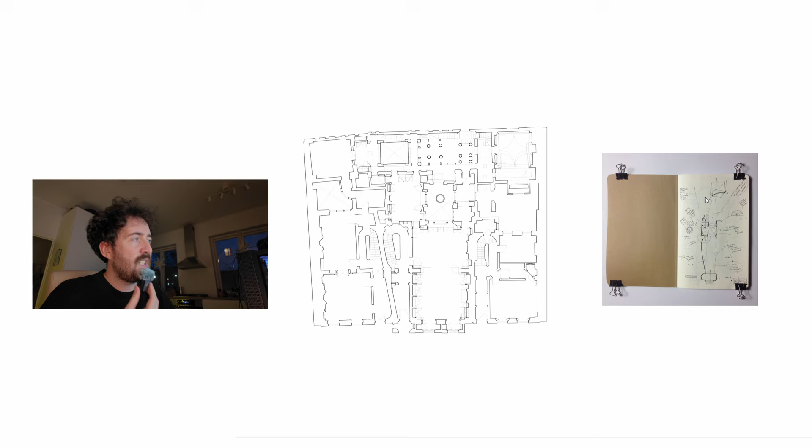What you're seeing here now is a survey drawing of the Soane House that I produced back in 2016 as part of my written dissertation. On the right is a photograph of a sketchbook that I carried around with me on one of my many trips to the Soane House.

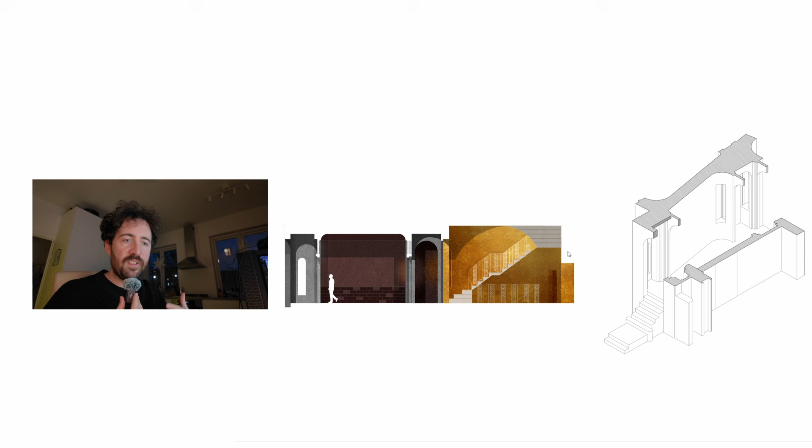At the beginning of this portfolio journey, this thesis journey of mine, we were each assigned a house, a precedent, and challenged to survey that house and then develop an architectural proposal that we argued would improve it. Because the Soane House was one of the houses available to us, and I had already written my dissertation on it, I asked if I could use the Soane House for the basis of this project.

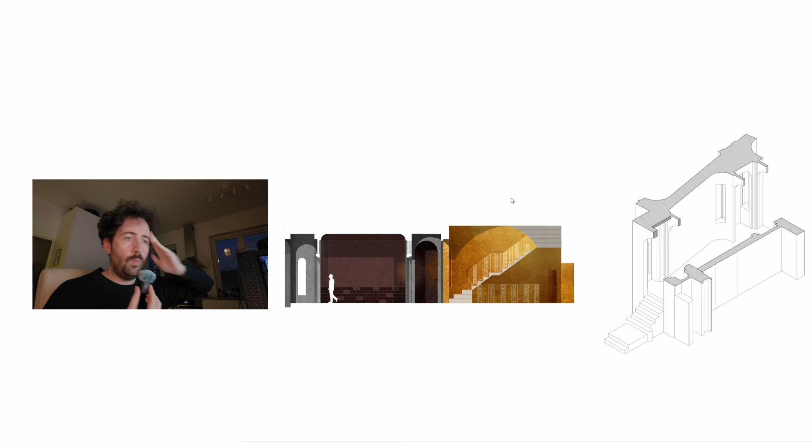What you're seeing here now are actually two drawings I produced as part of this elaboration exercise, where we would take a part of an existing house, study it, and then propose an architectural intervention within it - either adding something, removing something, or tweaking something. It was a way of understanding how we worked as architects, and how you can do quite a little to make quite a lot happen with an existing architectural space. This Soane House study, in conjunction with the dissertation itself, became the entire foundation of the thesis and the portfolio, and you're going to see that now as we go along.

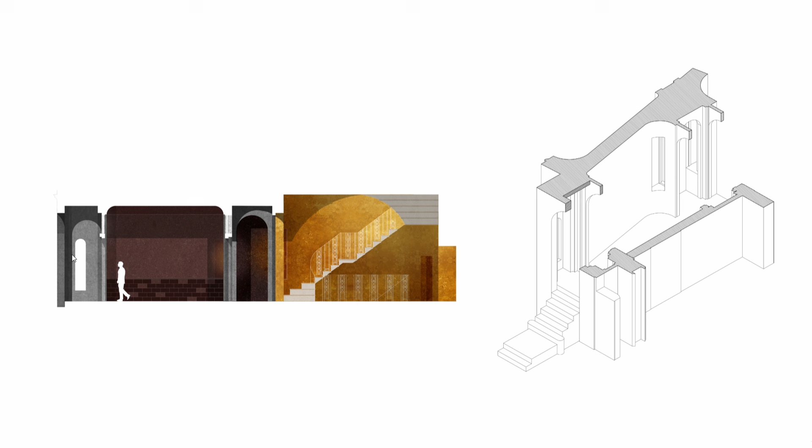What you're seeing here now is a cutaway isometric drawing of the entrance threshold to the Soane House, and then this artfully rendered section drawing that demonstrates the sequence of spaces upon arrival. If we jump onto the next drawing, that same space has been drawn in plan twice, with a model photograph of the existing condition.

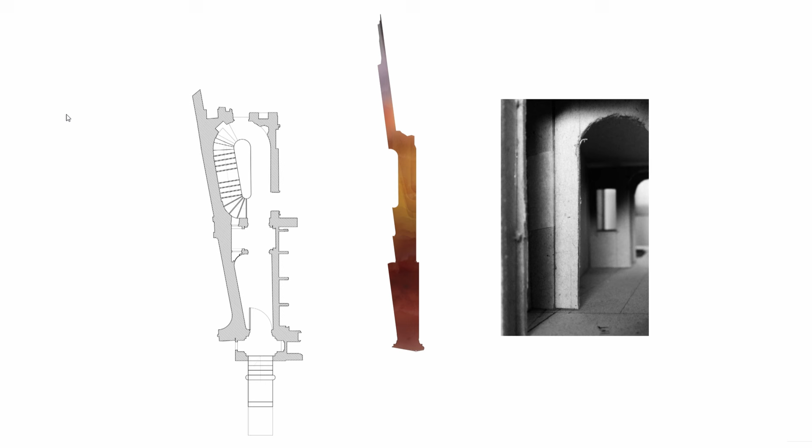What you're seeing here is that basically the entire dissertation and this study overall was about redrawing the plan of the Soane House based on the experiential quality of the architecture - not necessarily what's there physically, but what can be felt almost metaphysically. So here is a part plan of that entrance threshold. You come in off the street, there's a raised ground floor, an antechamber, and the hallway is broken into, I would argue, three spaces. At the end of that space we have the beautiful stairwell, which anyone familiar with the Soane House is probably visualizing right now.

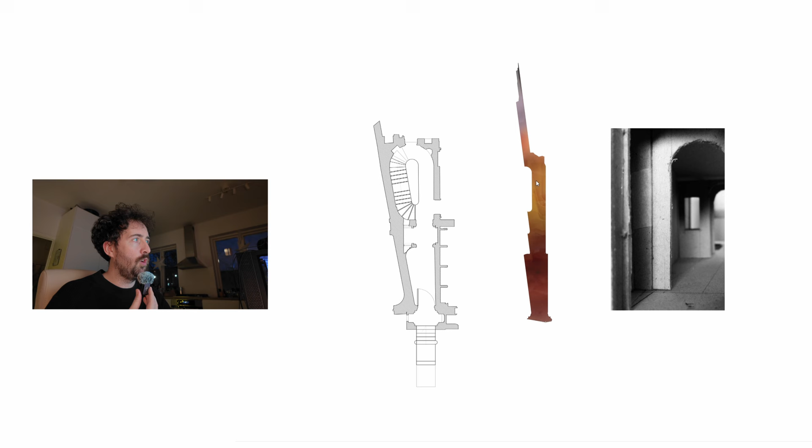This is the plan as it exists, but this, in my opinion, is the plan as it is experienced. The space almost dissolves from four to one based on how this model photograph suggests the spaces work in sequence. It's almost how the space is contained and broken into multiple pieces, but in section the space arguably is one space in its entirety. And this works not just across one level, but multiple levels when you introduce the verticality of the stairwell into the mix.

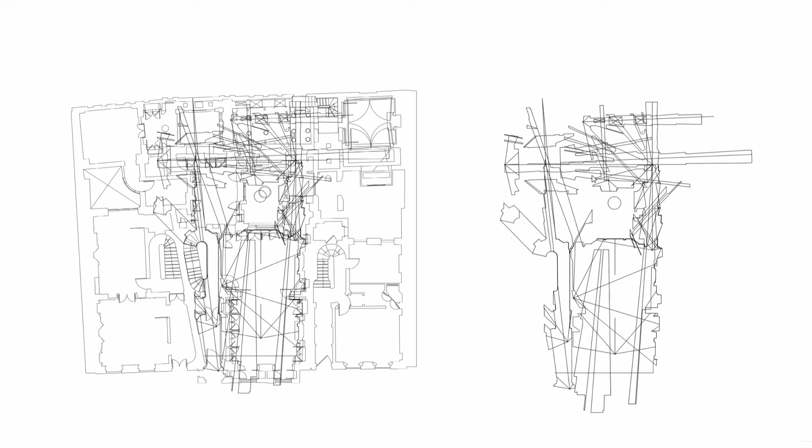Then we take this approach and apply it to the entirety of the ground floor. We can abstract these splays to something like this, and then assess the spaces that I consider are of the richest architectural quality. The rate at which these intersections occur suggests there are more spaces visible beyond the vantage point in any location. That suggests that spaces such as the reading room, this hallway to the right - this threshold, which is a wonderful sequence of spaces - and the breakfast room, and the study at the back, are of an incredibly intense architectural quality.

And this just fascinated me as an architectural study. The Soane House is one of my favorite buildings, one of my favorite pieces of architecture, because it has that incredible rich texture to it, spatially speaking.

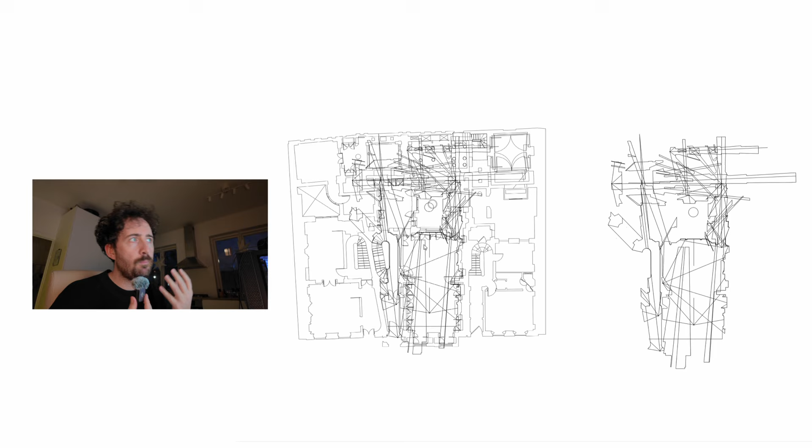Okay, we know that the Soane House is good architecture, but what do you really do with this information? And how is this layering, this effect of blending, how does it occur physically?

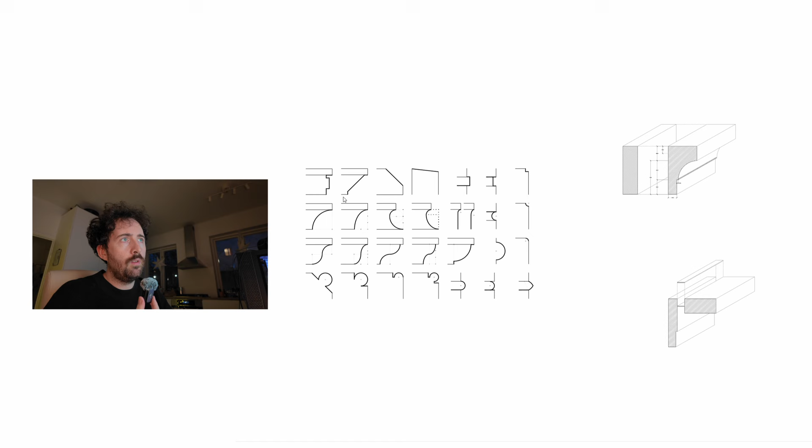So what you're seeing here on the left is a diagram, I believe an existing diagram, a piece of analysis that studied all of the coving profiles that exist within the Soane house. The idea then was to take one of the existing coving details

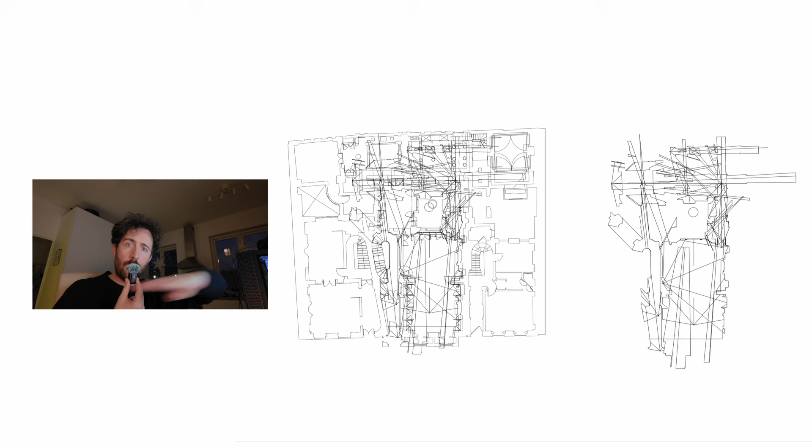and remove it from the lining and replace it with a roof light. That's it. So the idea was, can we get this layering effect that occurs on the ground floor on a singular plane by introducing an opening in the ceiling by removing the coving? Can we get the effect to work vertically also?

So what you're seeing here is a before and after photograph where the molding in the ceiling, the cove detail, is removed and then replaced by the light well.

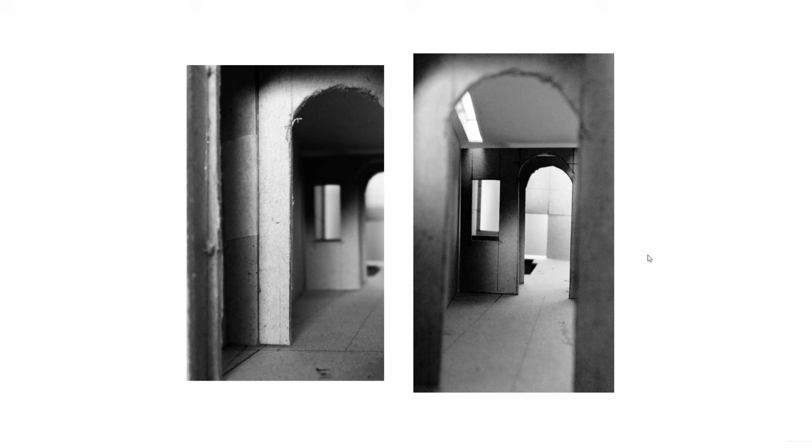And yes, of course, this is a series of models that prove the point I'm trying to make. But regardless of whether this thesis is correct, I still think it's an interesting place to begin a study. This was the beginning of the thesis and the portfolio.

But before the thesis sort of begins proper, we were taken on a site trip to London. And what was really unique and frustrating about this is that as a unit, I think there were 20 of us, we were not actually assigned a site in London. We were just given London for the week, and it was left to us to go find our own site.

And it overlooks Highgate Cemetery on the east and the west, and a giant public park, I believe it's called Waterlow Park. And there are some incredible vistas over the entire city of London. And I just figured this is really dramatic, it's a really cool space.

This is where I'm going to build Soane House 2.0. Obviously that wasn't the idea at the time, I don't know if that was ever the idea, but the idea was I'm going to propose something here in this really dramatic, wonderful part of London, on this site.

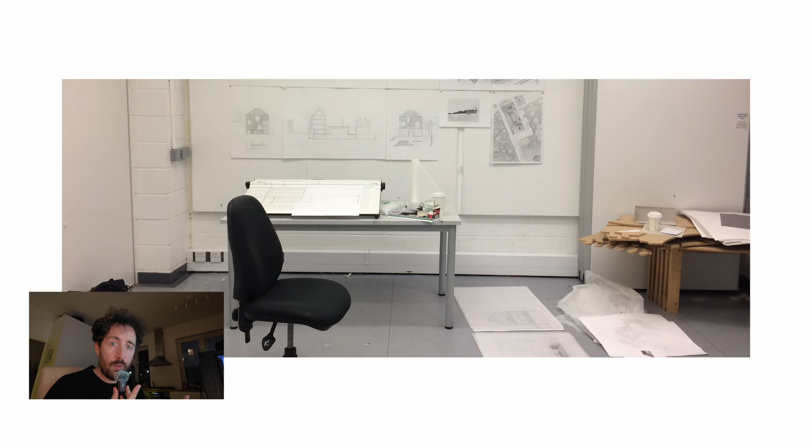So I decided to just go out, buy a piece of A1 tracing paper, set up an old drawing board, and just go to town on it, drawing what I was inspired by and what I felt like drawing. So what you're going to see now is a series of those very first A1 pencil drawings that really kicked off the thesis proper.

Really what happened here is I set up this A1 page, strapped it into the drawing board, and I just started from the left and went from left to right. What you're seeing here is just these really early sketch-like technical drawings in a way. So what you can see here is I just start with the street profile and it goes right off a cliff because I'm proposing this excavated basement layer here.

And then I just start drawing what a person would see at any one point and then trying to translate that across sections. So section flows to elevation, to reverse elevation. We have a little bit of plan here. And I just started projecting and sculpting out these spaces from one another.

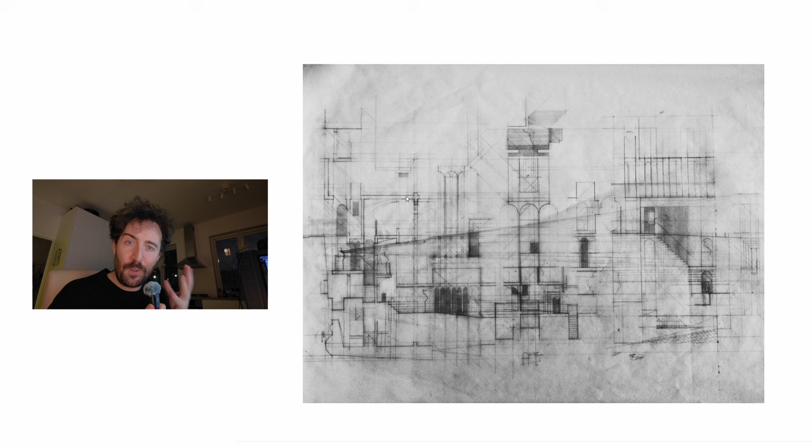These drawings are incredibly messy. And you'll note that there's some annotations here, some different arrays and pieces of detail, and it really just becomes like a giant A1 sketchbook of sorts. Only rather than drawing with the arm, I'm drawing with the wrist, because I've got the parallel rule, I've got the set square, and I can really just make moves really fast.

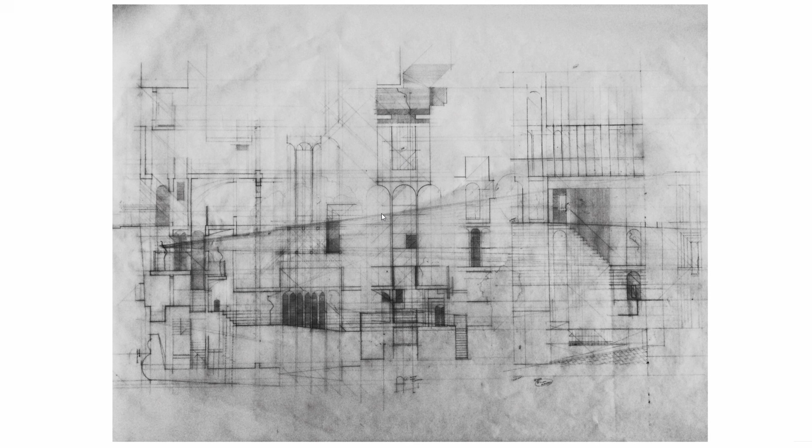So you can see here there's some indication of section and space and volume and depth. And then there's some indication of circulation here, it looks like a staircase. And then you can see how the perspective line splays here. Really what I'm thinking about is how the spaces in the Soane house work. So really I'm already thinking at this point about how do we make this really rich, really dense, and really architecturally interesting to me?

So as I'm working on this drawing, my professor sees it, gets really excited by it, and he's like, give me 10 more. So I was like, yes, sir. Let's go, let's do some more. So then I'm on this sort of pencil hand drawing journey at this point.

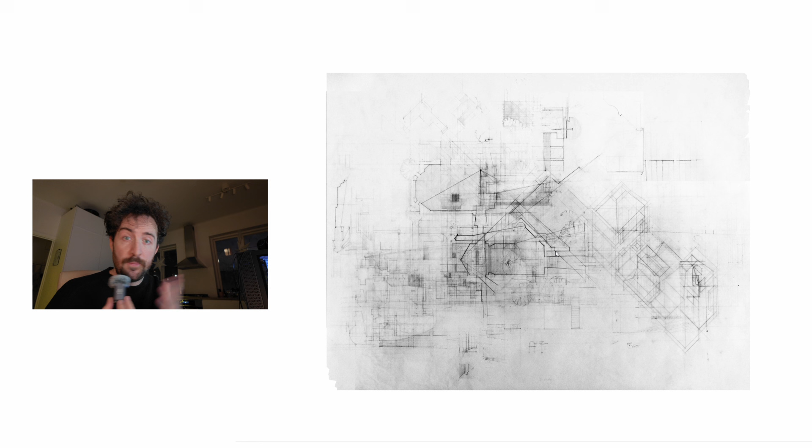And then you're going to see another drawing here now. And you can see even in this drawing, and you have to forgive me, a lot of these original drawings no longer exist physically. Like, they were thrown out in the summer of 2017.

My professor did contact me and was like, yo, I got all your drawings. They're in my office, but I can't keep them for much longer. Do you want them? And I was like, I do want them, but I'm already living and working in London now. I'm not coming back to get them. I've already got a job. Throw them out. So he probably did. So I have no idea where they exist now.

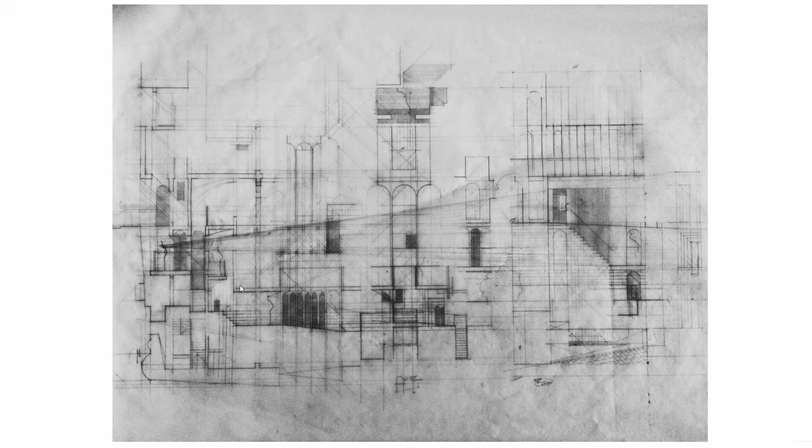So what you're seeing here is basically a series of scans and photographs and overlays that were made as part of the thesis project. So this is another one where it's sort of like drawing on top of drawing on top of drawing. So you can see faintly that original drawing, the one that we just looked at here, is actually underneath this, and it goes again and again and again, and the drawings all stitch into one another.

But what you can also see, if you've got a keen eye, is that these splays are now being introduced into the plan. And what I'm really interested in here is how we can connect one room to another room to another room visually. And you can see here there's a little bit of an overlay of the Soane house in pencil form right here.

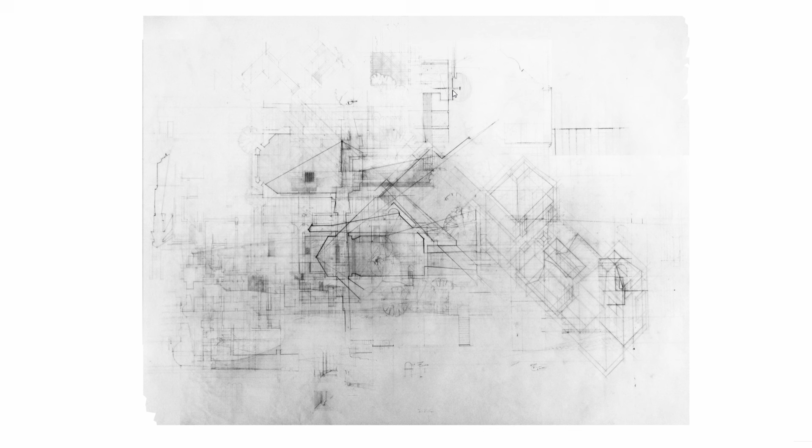But then there's also like these 1 to 5 technical details here. It looks like I've drawn the screw through like a window frame into some brickwork. And then there's some isometric action happening here as well. But this is actually a little bit of a later drawing that's been included. And then we're going to go on to the next one.

And then I'm sort of drawing the site as well at the same time. So it's important to note that I've got one drawing board and I'm only ever working at one drawing at one time, but then occasionally I'll get a little bit bored and I'll overlay that drawing with another one, work on that one, and then go back to the other drawing.

So I'm just spinning plates, working over the drawings all the time. The drawings do have a scale, roughly 1 to 50, but sometimes I pivot into other scales at the same time. Here's a planimetric drawing of the site, showing how Swan Lane cuts down and breaks off to Waterloo Park. I'm just drawing the terrain. There's some sort of structure here overlooking the city, but I don't quite know what it is yet. At the same time, I'm also testing these ideas in model.

So really, I go from this drawing, and then it's like, this is an interesting section - how does it work in 3D? I'm testing it in 3D, and then I go back to the drawing, which obviously has more detail.

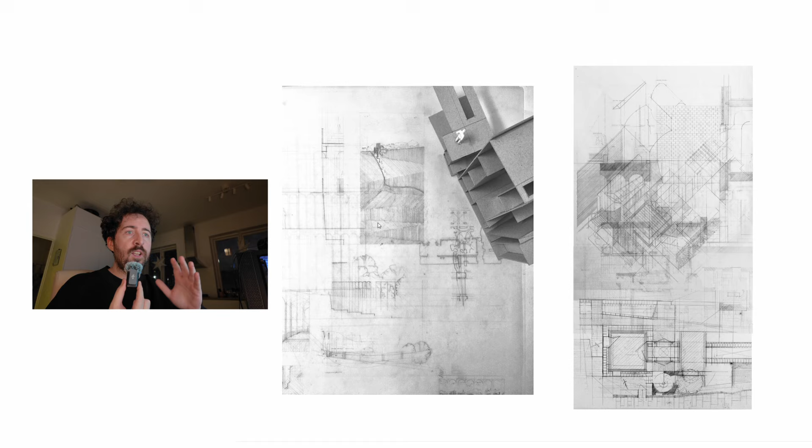It's important to note that even though I don't really understand what this building is going to be at this time, I'm always very aware of the nature of the site itself - the sight lines, the fall and gradient of the landscape, the existing context. This isn't being drawn in isolation.

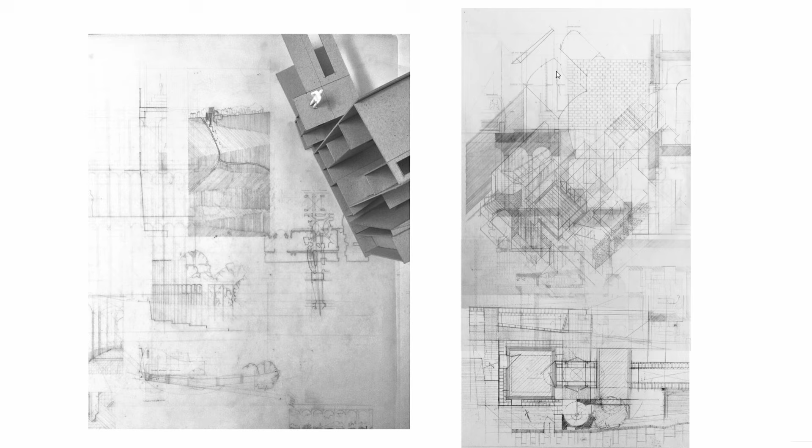It's being considered. And on the right here, there's this exploded axonometric, where you can see I'm introducing the coving details, because I'm really interested in how there's this tension between how the space looks from the outside and how it's actually experienced on the inside, and how lining is curated to dictate our impression of a space, and how we measure the thickness and depth of a space. That's all lining - it's all artificial, it's all fake. And I think that's amazing, really exciting. So lining is going to come into this eventually.

And then I have another part of a plan here. You can see that even within the space of a week or two, we go from this dreamlike idea of a space to consideration for structure, thickness, door openings. It really does just jump along quite quick through drawing. It only happens through drawing - I'm only able to do it with the pencil, the parallel rule, and the set square.

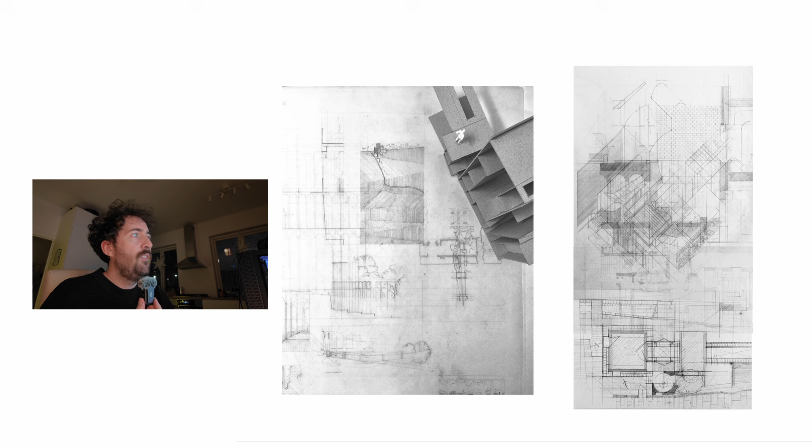That's really what I'm about here - I just want to see how extreme. Can I turn it up to 11? Let's find out if I actually get there.

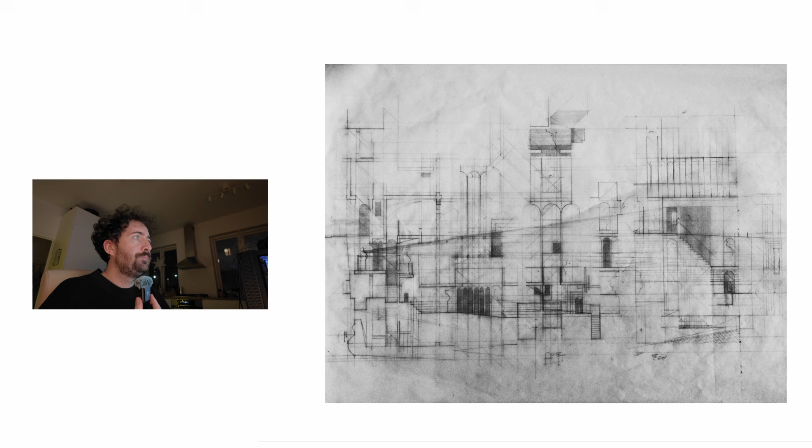And that's what you're seeing here with this - there's a space that intersects visually with other spaces. There's part of the existing terrace where at this time I've taken over. You can see the existing terrace floor plan goes into this one, then there's a tree line, an existing wall, and I'm really just drawing everything here. I really just have permission at this point to go wild, and it's so much fun.

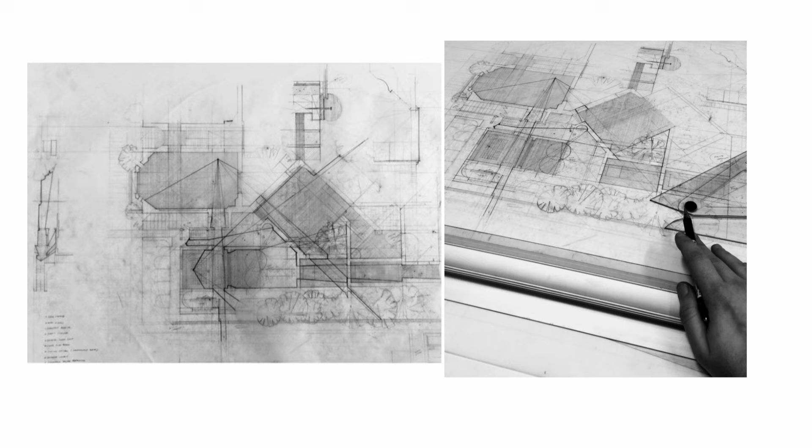You can see there's enthusiasm in these drawings - I just love it so much. And again, there's just another version of it, and you can see here on the drawing board, a photograph of the actual drawing board from 2016.

There's hand-drawn surveys of the existing terrace and semi-detached houses around the street, a bit of a wall survey, and some basement details. I'm drawing at all different scales at all different times - another version of the overlay from before, going from plan to section to elevation, little 1 to 5 details down here, everything. I'm just drawing everything I can, really building an understanding for what this piece of architecture is going to be at this point.

Problem is I've got a midterm review coming up, and I just freak out - nothing's finished, I need some final work. So what do I do? I completely freak out, stop, drop the pencil, and run back to CAD. I'm just going to draw up what's in my head now, everything I've got here on these pages, and see what I get.

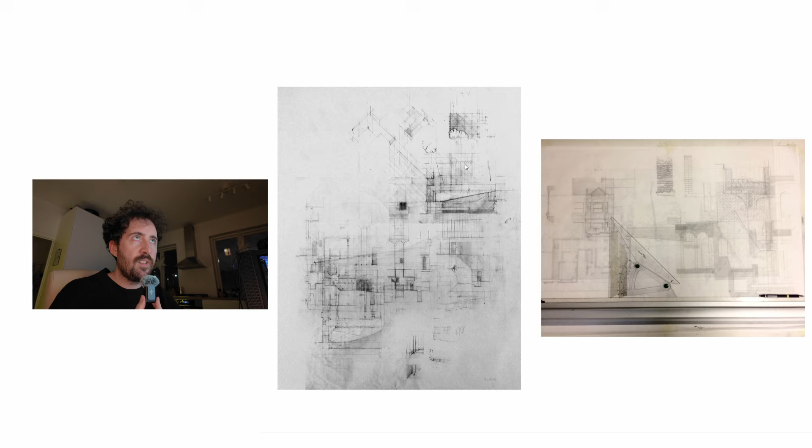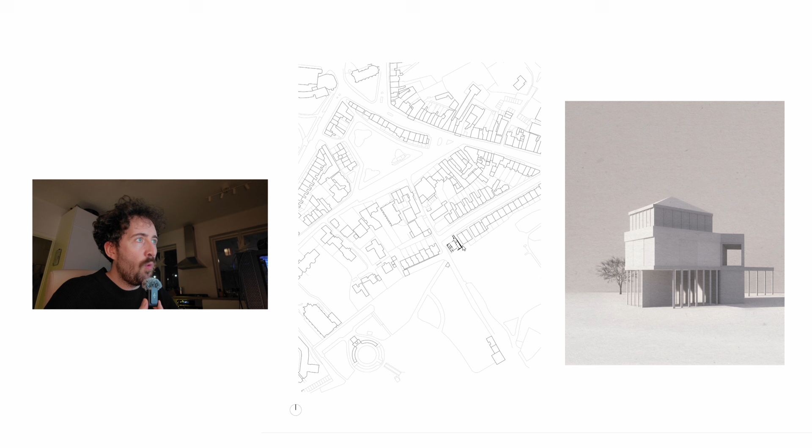And this is what we're looking at. Now, I'd argue it's a little bit boring, but they're not bad drawings. Here's the site plan - it's really a bit unfinished, and we've got sort of one house at this point, even though the vision for the project is that it will become many houses along here. We've just sort of got the first house.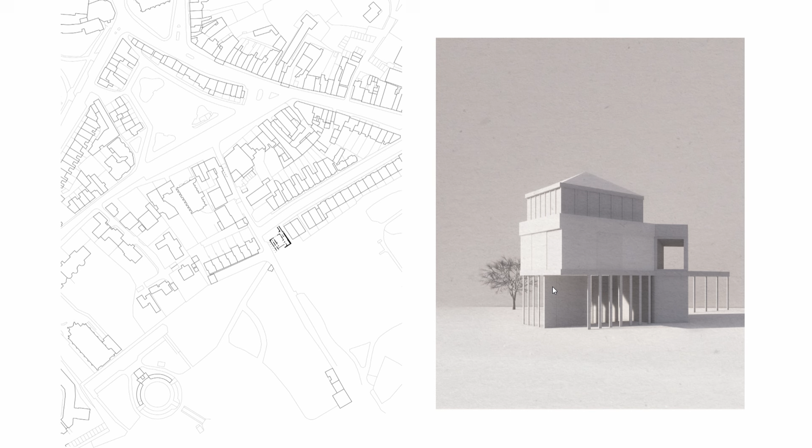So this is sort of the culmination of all the drawings here - we've got a little bit of a colonnade, a house across 3 stories, there might be a basement. We've got different architectural languages on each floor. It's a little bit of an odd house, like a little treasure box of different ideas. It's got a little pitch roof to respond to the context, but the pitch roof also has a false depth - I'll talk about that in a minute. This is sort of just where I got to.

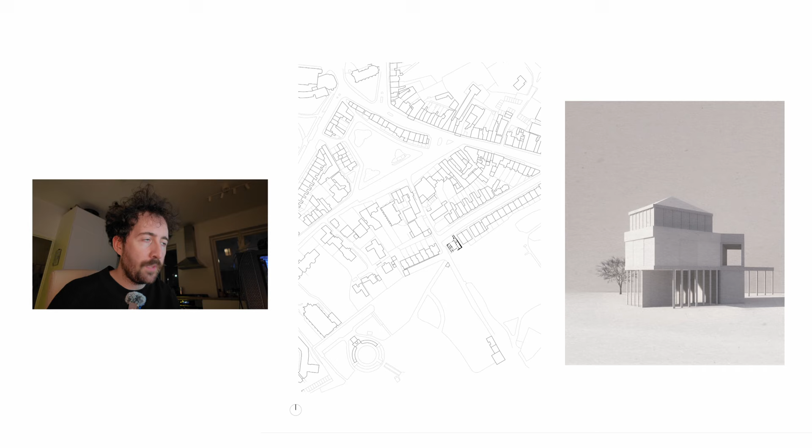These computer drawings were received just fine, but I ended up having a meeting with my tutor after the review, and he was like, we know you can draw with a computer, we know you can do 3D models. He said he'd prefer it if I just spent the final semester - the remaining 12 weeks - going as far as I can with pencil drawing. And I was like, yes sir, let's go. So that's exactly what I did.

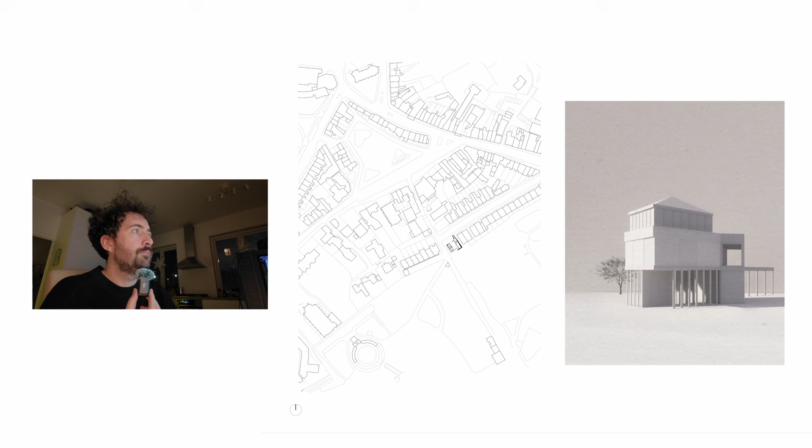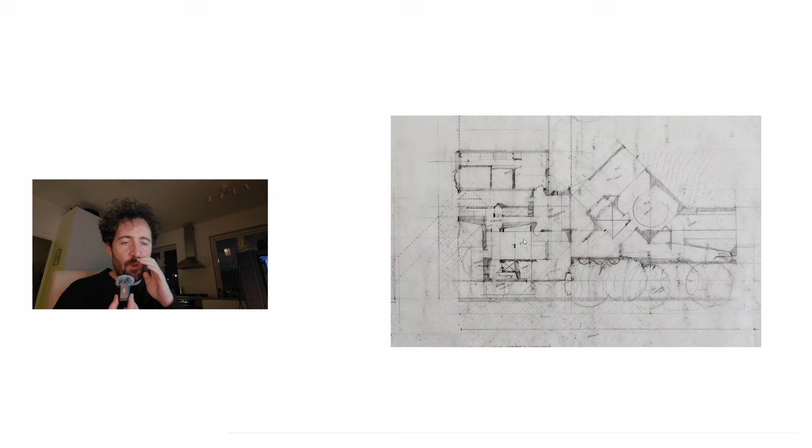And you can see even at 1 to 200 scale, I'm sketching the pavement texture, doing the stair treads. Although the drawing is at a 1 to 200 scale, I'm drawing at like a 1 to 50 scale. I don't know why I was doing that - it's just a bit of a weird thing to do.

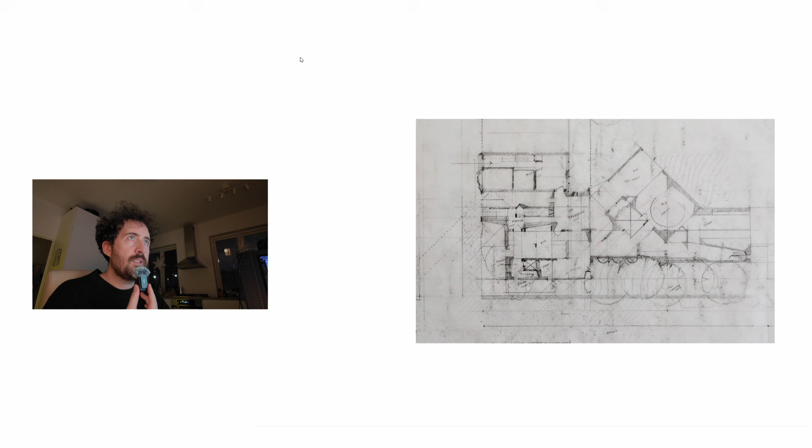Then I just start getting into 1 to 50 scale again. So what you're seeing here now is a 1 to 50 plan drawing based on this sketch, so obviously it's more resolved. But I'm still sort of struggling - I keep getting caught in the first house, not able to go to house 2 and house 3, because I think at this point it's going to be 3 houses all built as one house.

But I can't get beyond the first house because I just keep getting caught up in what this space is going to be. You can see here, the way to get around the level is that there's a public stairway off the street that takes you down into the park underneath a bridge, which I'm using to connect to the existing terrace. But then in off the street, you can come in at street level where the house is set back. You can go down into a basement here, or go through another bridge into the house itself.

So the house is sort of like an island set back from the street on a level of its own, which I was just really interested in—this idea of separating the house from the land almost, landlocking it in a way.

You can see there's the remnants of the 45-degree pivot here, but it doesn't really go any further. It just turns right back into the orthogonal arrangement we had before. And you can see there's different rooms, different spaces, and it is very zone coded at this point, if I do say so myself.

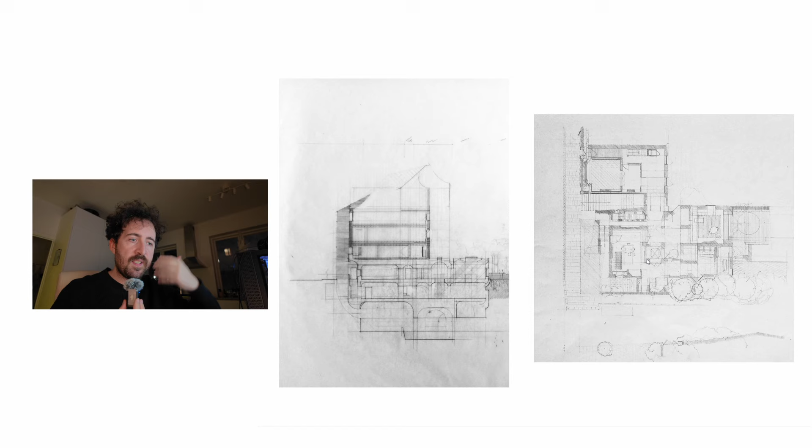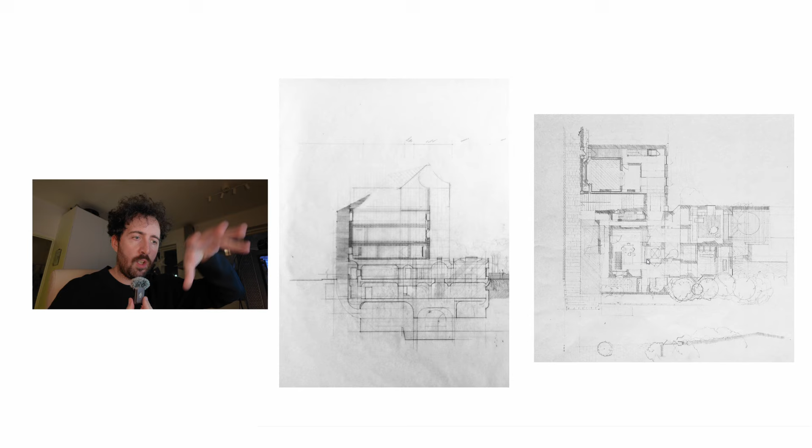But what you might notice is that here I've drawn some coffins. At this point I have a better understanding of what the brief for this project's going to be. The idea is that the house on the hill is going to be a traditional Irish wake house of sorts, where people can hold a ceremony, events, parties to celebrate the life of a deceased loved one. They can also cremate the body, so there will be a crematorium in the basement, and there will also be a private garden where you can have a private cemetery of sorts that can lock into this grieving landscape that already exists on the rest of the site.

But how do you do that? That sounds quite complicated, right? So I have to configure this sequence of space in a way in which they can flow naturally. But what you'll see here is that there's way too much architectural detail in these drawings.

I want to point out here that there is a concept at this point that anything below ground is made of this weighty mass, and then everything above ground springs above it and is made out of timber—timber lining, timber construction. So you've got this sort of light house above, and then you've got this heavy, dense space beneath.

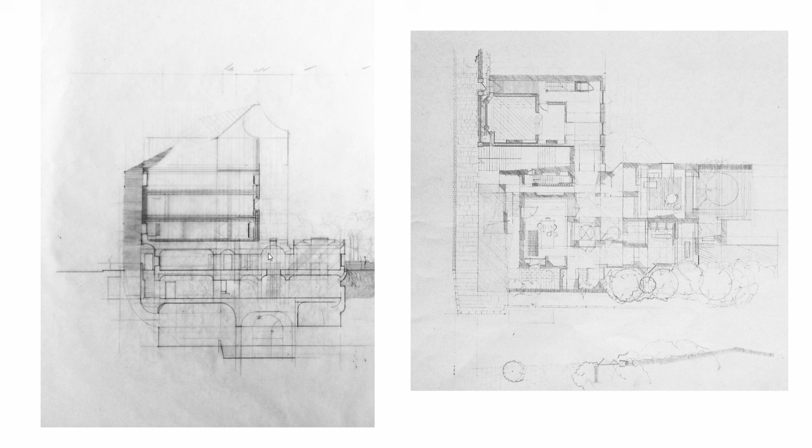The problem is that I still can't resolve one house—how am I going to resolve 3 houses? So my tutor encourages me, says, why don't you just push it? Push it now and see how far as you can go. Let's see as far as you can go.

I need a drawing fast—show me how far you can go with this grieving landscape. So this was the largest drawing that I produced as part of the thesis. I think this is like a 1 to 200 section, maybe 2 pages cut together somewhere.

You can see here that this was the street level, this is the basement with the heavy hatch, and then we have these light pavilion-like timber structures springing up above them. So you've got house 1, house 2, house 3, and then this sort of catacombs just continues all the way down. It's too much.

It's too much. So now, before I didn't have enough, now I've got too much. And what you're seeing here is this really delicate perspective drawing explaining how visually all of these spaces would work from an experience point of view—these perspectives would all intersect and overlap.

At this point you're like 8 weeks out from the final presentation. It's like, I'm never going to finish this. So then the professor's like, oh, you've gone too far, trim it back. And I'm like, okay, no problem.

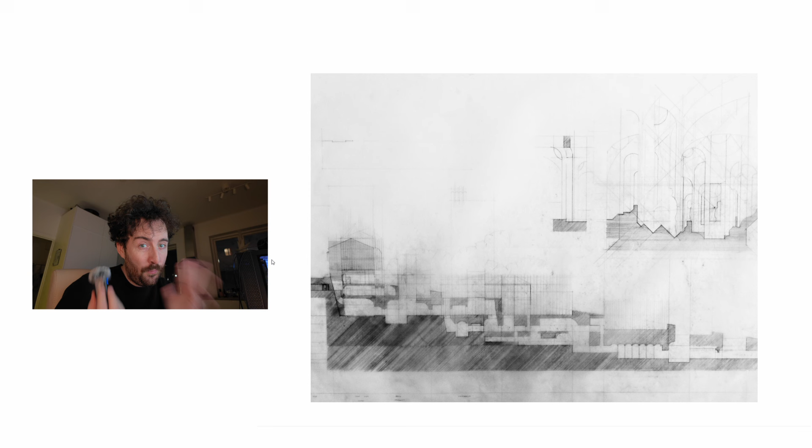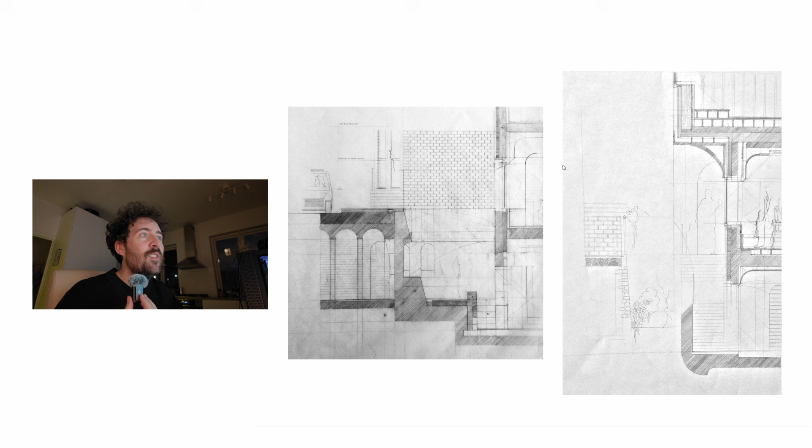This is becoming a problem, and people are starting to get worried on my behalf—professors, tutors included. They're like, hell, you just keep moving sideways, you just keep drawing the same house over and over again. I'm like, I can't help it, I can't stop.

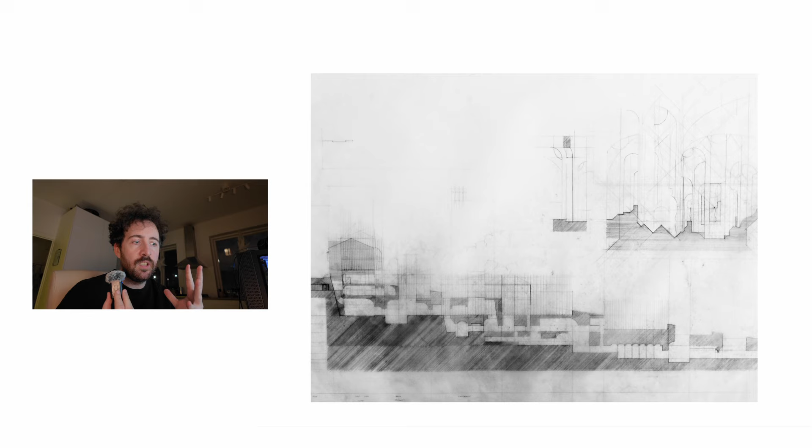So all of a sudden it's like, you've got to draw things with some sort of finality. Like, you've got to do it. You're working at the wrong scale. You've got to draw it.

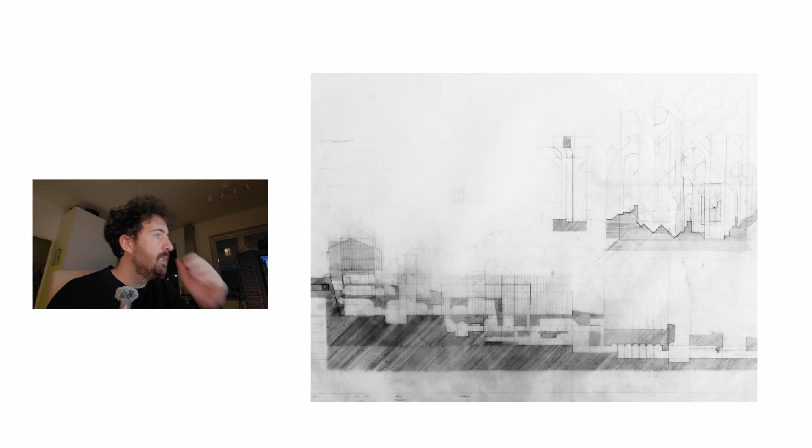And I just realized, it occurred to me at that point, I had never drawn a site plan. I knew what the site was, but I hadn't drawn a site plan. So I said, you know what? I'm going to spend the next 3 days—I'm going to spend the whole weekend, and I'm going to draw the entire site.

I'm not going to draw the building. I'm not going to draw my proposal at all. I'm just going to draw the site. And at the very end of the weekend, I'm going to put my proposal, whatever it is, in it. And that's going to lock the project in. And then I'm just going to work from outside in, because at this point, I've only ever been working from inside out, and it's becoming a problem.

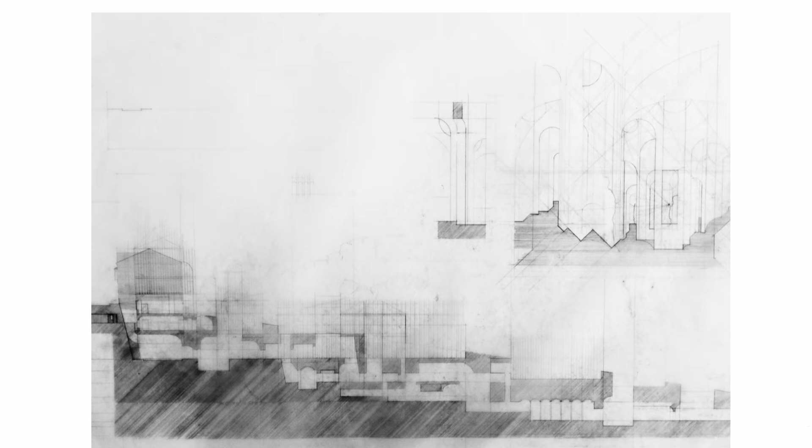And I did not add my proposal, this little cluster of houses here, until the very end. And then what I did, and this was a brave and probably stupid thing to do, when I finished adding my proposal in, so you can read it here, there's like 1 roof, 2 roof, 3 roof. When I finished adding my proposal into the drawing, because this was all drawn on one piece of paper, there were no layers, it wasn't overlays, it was one piece of paper, right? I took the fattest 6B pencil I could, and I sketched in the shadow profile of my proposal, so that there was no going back.

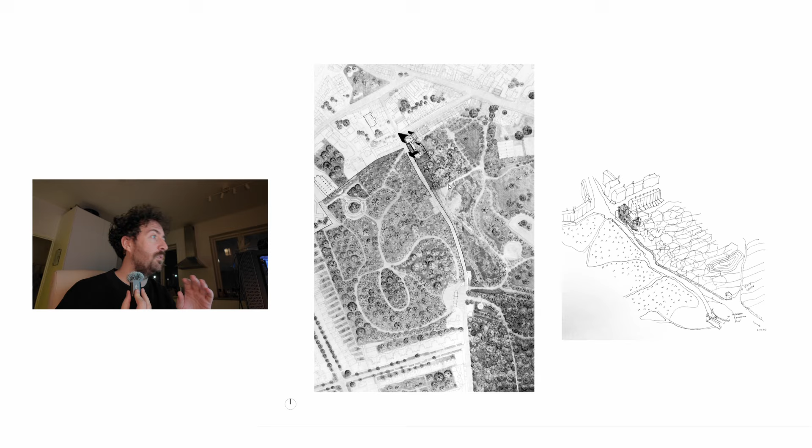This is it, it's locked in. This is your proposal. It isn't getting any bigger, it isn't getting any smaller. This is what I'm working with now.

And what you can see here is it's actually one building broken into three buildings. So we have a house at the front, a house at the back, and a house in the middle. And that house is a church, and I'm going to talk about that in a minute. And then on the right here, you can see there's a sketch that sort of summarizes this from a little bit more of an isometric point of view. It's just a little doodle that explains where it sits in the context of the site. And that's it, this is the proposal now.

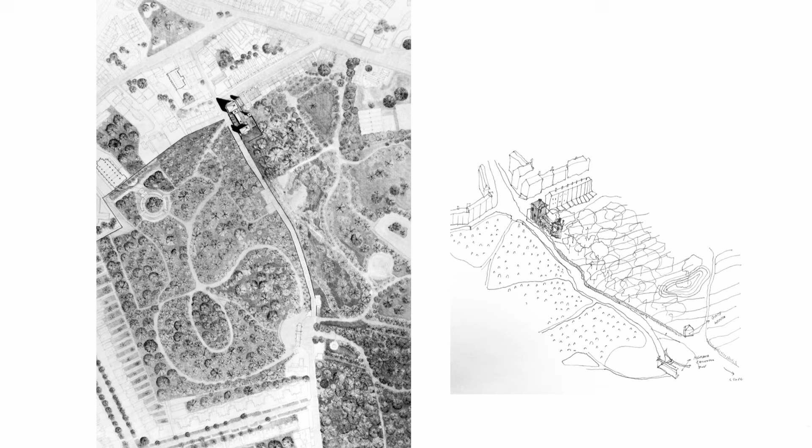So I only have like a couple of weeks left before the thesis is over and the portfolio has to be handed in for submission. So I'm a little bit like, got to get a move on.

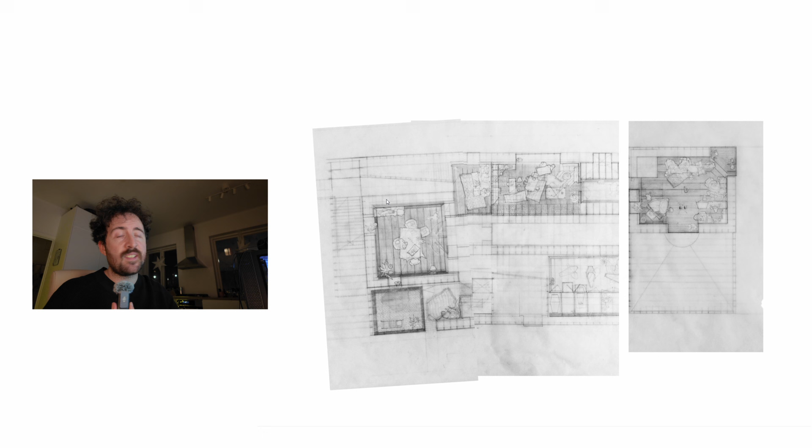And not only am I drawing what's happening in the solid, I'm also drawing what's not happening in the void, because I think it's important to explain that the house exists in two ways. It exists for the user, the person who is grieving, but it also exists for the owners of the house and the property, who have to navigate sensitively through these spaces and serve the others in the space. So that's why you might notice there's a peculiar wall thickness buildup within all of these rooms. It's approximately 900 mil, just enough for you to get through. In other words, the person who owns the house and works in the house knows how to navigate these spaces efficiently, whereas the people visiting the house for the first time are experiencing it the way they experience the grieving process, as a sequence of spaces they move through at specific times of the day for specific parts of the process.

So for example, you will come in and there's an arrangement room, there's a breakfast room, you go up, you go down, you go out, there is a ceremony held in the garden, there is a cremation process, there is a church service in the basement, and then there is a giant party at the very end of this sequence.

What's important is that as you come in on one side and you come through these spaces, you flow and go down and go out - and don't worry, I've got the plans to show this in a minute. Then you come up and you have this amazing celebration, this party, and then you go back out a different way, back through this space and out the door you came in.

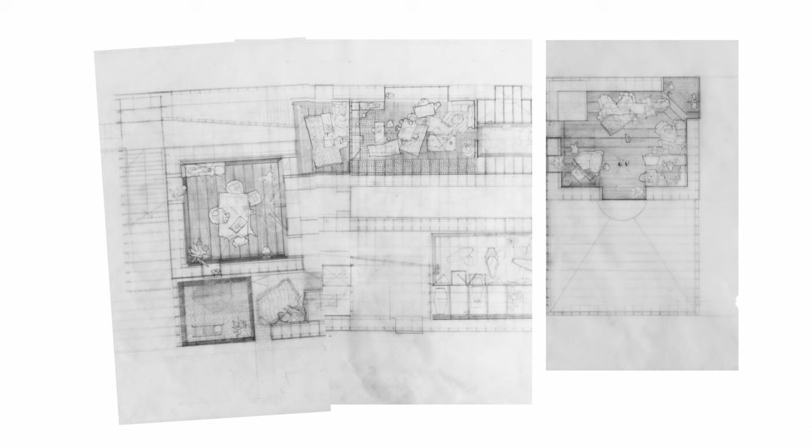So the idea is that you leave through the door you've come in, but you've been through an experience, an emotional journey as part of the grieving process. Incredibly convoluted - it sort of works in a way like an IKEA, which really wasn't the intent, but it's a loop. You kind of loop and loop and loop. But that was the idea.

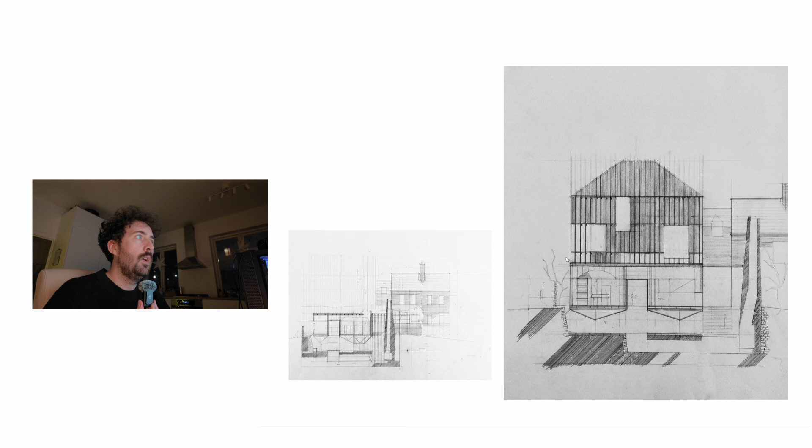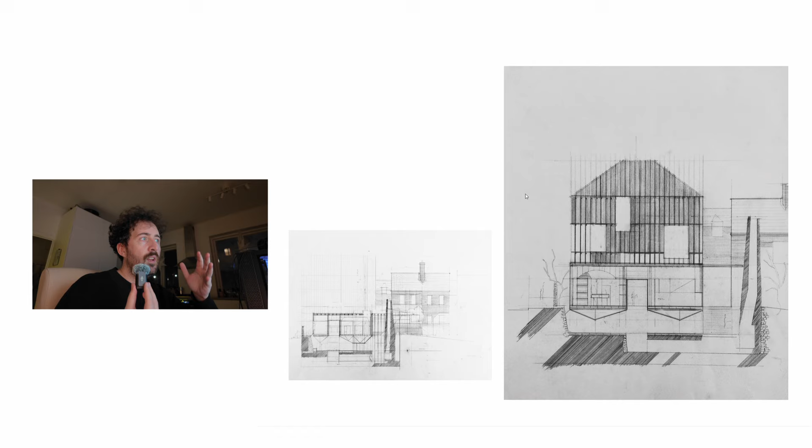And then this is the rear of the first house. You can see how the split levels and the windows are all very carefully calibrated so as to display your understanding of where you are within the space. Because it's not really about being part of the outside when you're on the inside - it's about having an experience that's real inside the space on the day that you're grieving for a loved one, maybe, I don't know. Very complicated project, unnecessarily so, I would argue.

And now we're going to talk about models.

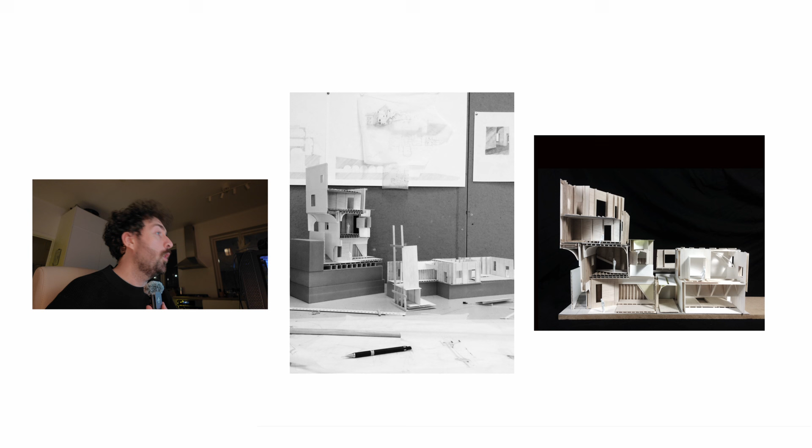So of course, all of these drawings were being produced in the build up to the final review, but I was also making models as well. You can see that this was my desk at the time, and these are all images that I include in the portfolio if I was going to a job interview when I graduated. You can see here that I was building sectional models, I was building plan models, I was just working away, doing everything at the same time.

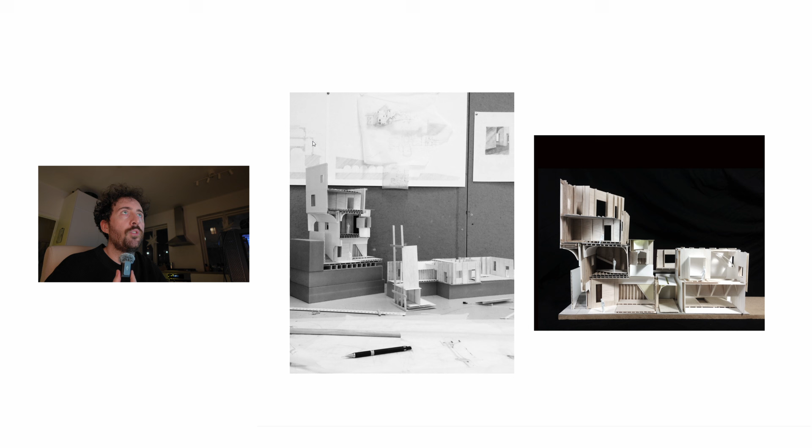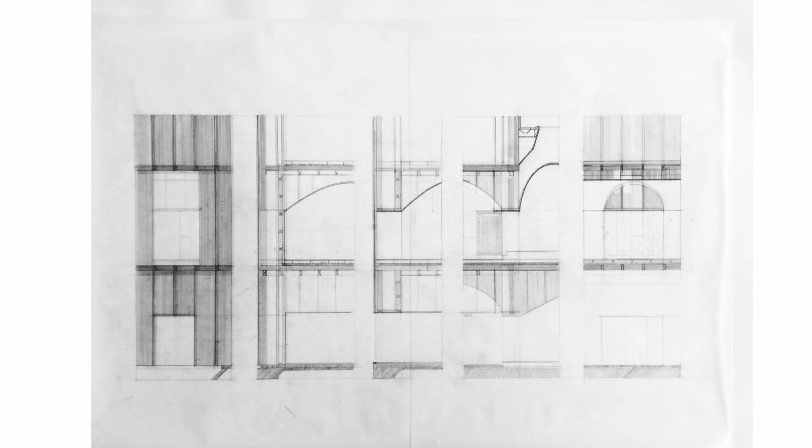And then again, two 1:50 sections showing two different parts of the house, and an isometric with the exterior lining, and an isometric with the interior lining. So this was actually one drawing on 2 pages. And then again, there's little part sections, some more overlays.

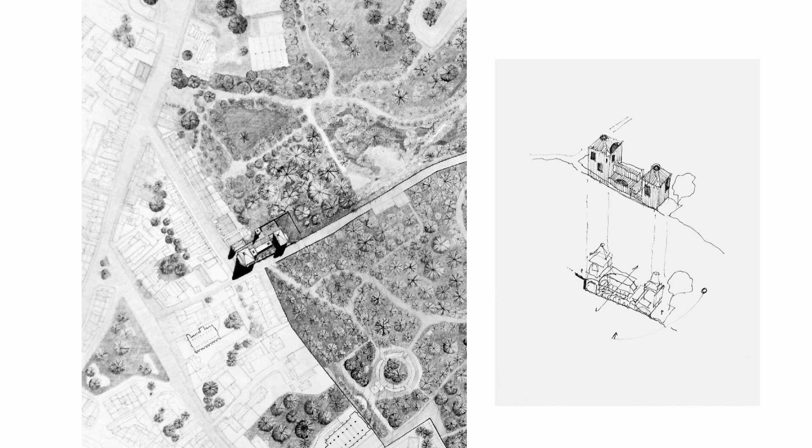And again, another plan from a different orientation, and sort of the way that this external skin can just sit on top of all the drama of the interior. And again, just some more experimental drawings showing the basement plan in sketch form, a version of the section. I think this was 1:100. Computer drawing underneath here - I'm going to talk about computer drawings in a minute.

And that was the academic portfolio. So basically the portfolio consisted of all those drawings at A1. The problem is that when I graduated, I didn't have the drawings anymore.

I only had photographs of them and I needed to be able to tell a story. And the biggest mistake - I want to clarify, I finished the master's program. I scored really well on this project, so I knew that it was academically strong, and I think I finished in like the top 10 in my class.

So I graduated with a distinction, so I knew the work was good, but I needed to get a job. So what do you do when you've got just basically like 100 unfinished A1 drawings that you no longer have access to? So I tried to tie together a story and a narrative, which is what I've sort of shown you here today. But you're going to see in a minute that this does exist as a physical portfolio.

But when I graduated, the first thing I did, I got a job interview really quick. And I went to this giant commercial architecture practice, and I only had photographs of the drawings. And the 2 partners who interviewed me, they liked the drawings. They said, we would like to hire you.

Our problem is that the unfinished nature of this work suggests to me that you are a candidate, or you would be an employee who never finishes work. And I remember being really frustrated by that comment because that actually wasn't the case. I was only given permission to work this way by my tutor because I'd already demonstrated that I was very capable of finishing work. However, the storytelling of the project is what let me down.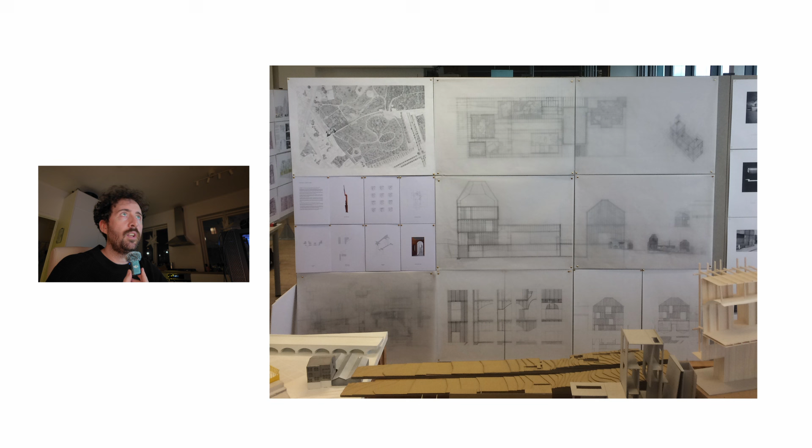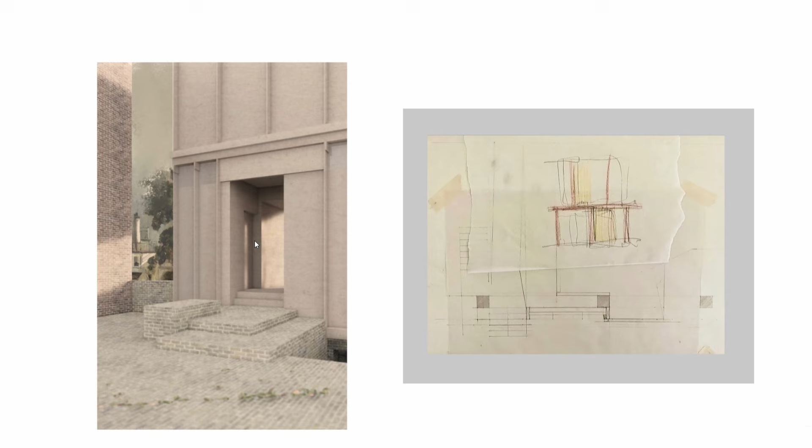So what happened next? I had this design, I had these drawings, I had all this unfinished work, and I really wanted to finish the project. So I took it into the computer and just started drawing it up. And I started making 3D models and 3D images. This is a selection of these images that you're going to see now.

So I built this 3D structural model. I did this 3D isometric drawing that shows the entire structural frame for the house. And then I started breaking all of the rooms into little projects in themselves and then annotating them correctly, creating these little diagrams for them.

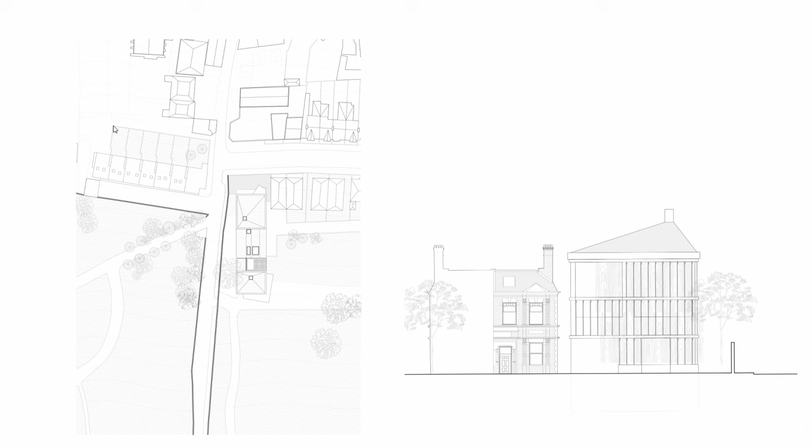So you can see here's a quite banal 2D site plan, elevation drawing. And then this is like the comprehensive 1 to 50 floor plan. It also goes with a basement plan that explains the entire sequence of the project. Now, in my defense, this drawing should be annotated, and the drawing was annotated.

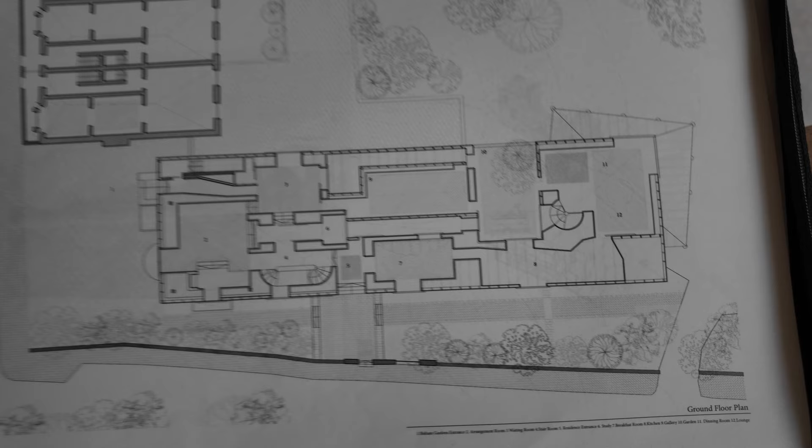So you should be able to see a PDF version of this now, or you should be able to see a video. There's a physical version of this you should be seeing now that has the annotations on it that explains how every single room works in the context of the thesis, and how every single room works in the basement as well. The problem is that I no longer have that PDF. I don't know where it went, so I only have the base file.

So you're just seeing the drawing here now. But I assure you, do not go to a portfolio interview without having your plan annotated with a north symbol and everything. So what I'm saying is I do have that, you can probably see it now in video. It's in the physical portfolio, but it's not in this PDF.

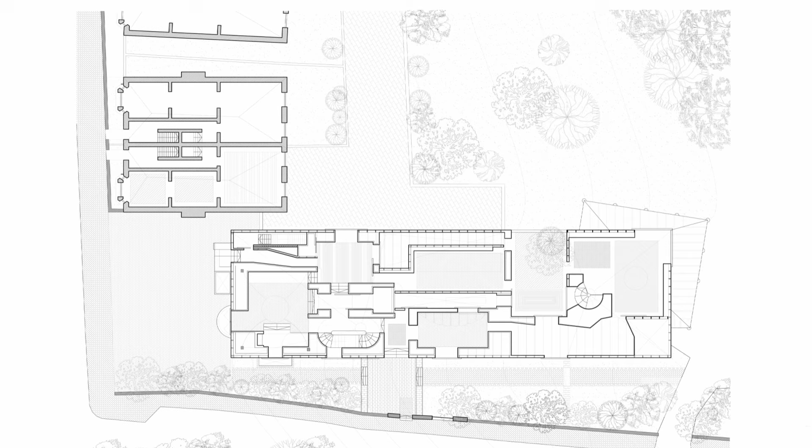And then obviously I'm just making some more 3D models, and I'm actually complementing the 3D images with the hand drawings to sort of demonstrate the richness and consideration for each of these spaces. So it's my way of saying, trust me, it's been considered.

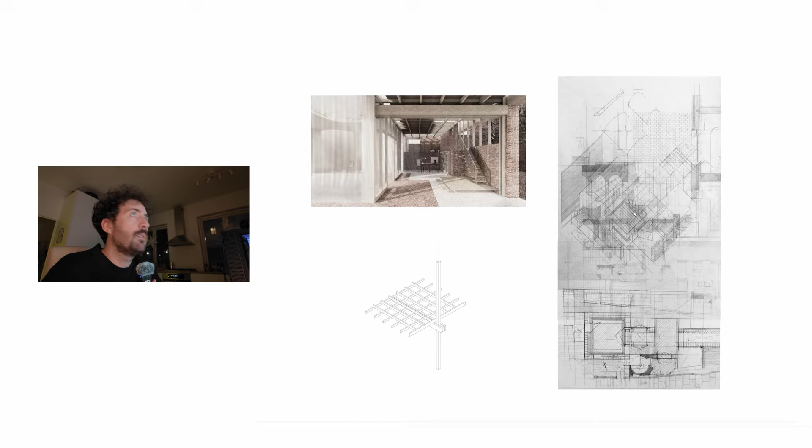One of the basement spaces, a technical detail, some more of that. Again, just these very painterly, minimalist interior renderings showing the complexity of the space and the split level, and the different openings and the way the light works, the way the staircase works. Not great 3D models really, but it's really just about explaining the project to your audience.

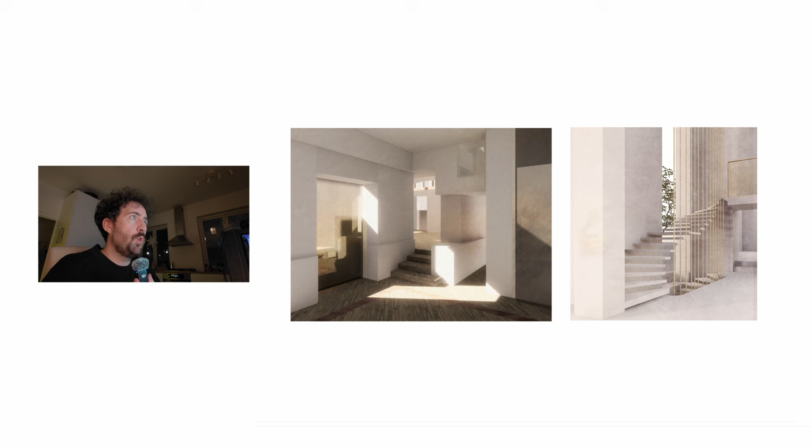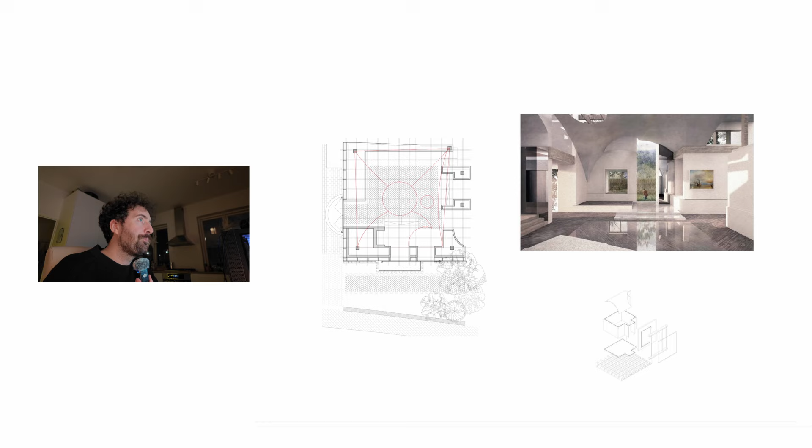Again, these plan diagrams explaining how the ceiling lining and the structure concealed within the wall finishes creates this really dramatic coving detail, views out to the garden. Another version of that drawing, the breakfast room with the ceiling cutaways.

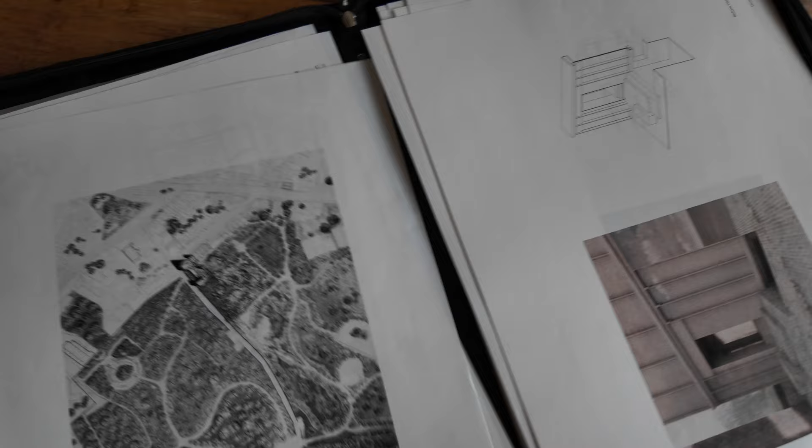Now, I just want to be really clear about something. This is my academic portfolio, and it's the portfolio basically that I used for a job. And you can see the physical portfolio here now, probably, if you're watching this in video. I just want to explain something.

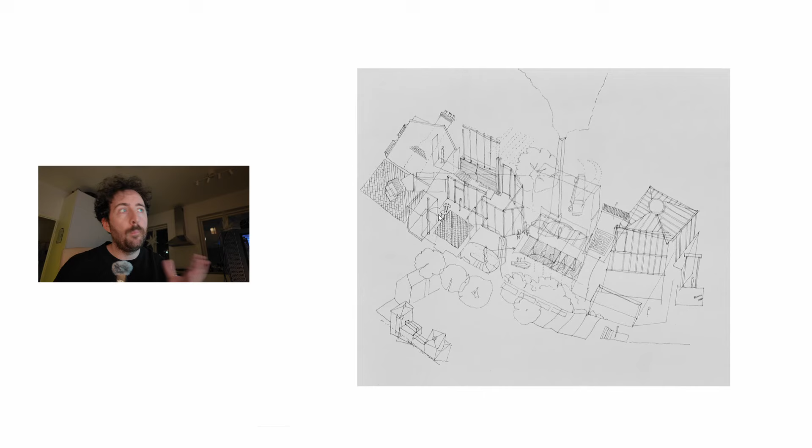This is a very peculiar portfolio journey. I would not advise most students to go this way. It's just more about how I was treated as a student. And my concern when I graduated was that I wouldn't be able to get a good job because I wasn't demonstrating CAD skills. When the reality is that these drawings got me invited to maybe 7 job interviews, and I think I got 6 job offers from those 7 interviews.

So it's my way of saying CAD skills are important. They are important. I had CAD skills before I worked on this thesis, but I went into the interview for my dream job, and I had a whole ton of Revit models that I produced in practice when I was like a part 1. And the 2 architects interviewing me were like, 'We're not interested. Just show me the hand drawings.' And I showed them the hand drawings, and they gave me the job. You know what I mean?

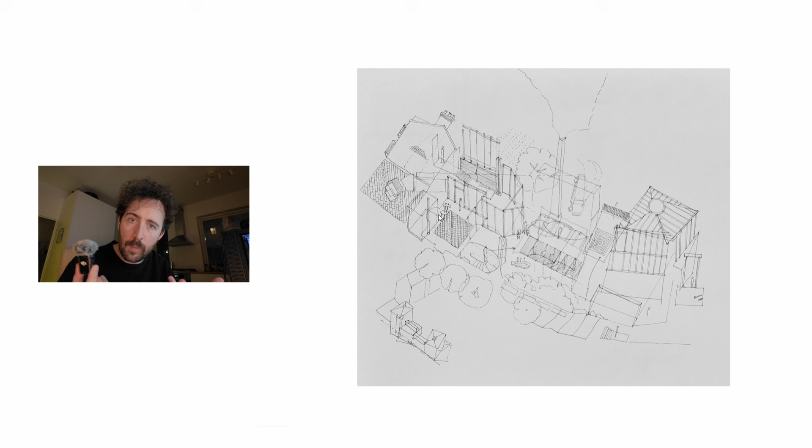So really, maybe if there's a lesson here, it's that your portfolio should be reflective of what your personality is as an architect, rather than you trying to fake something that you're not. So this portfolio, I talk about it - I mean, it's been 9 years now - I talk about it constantly because it's very personal to me.

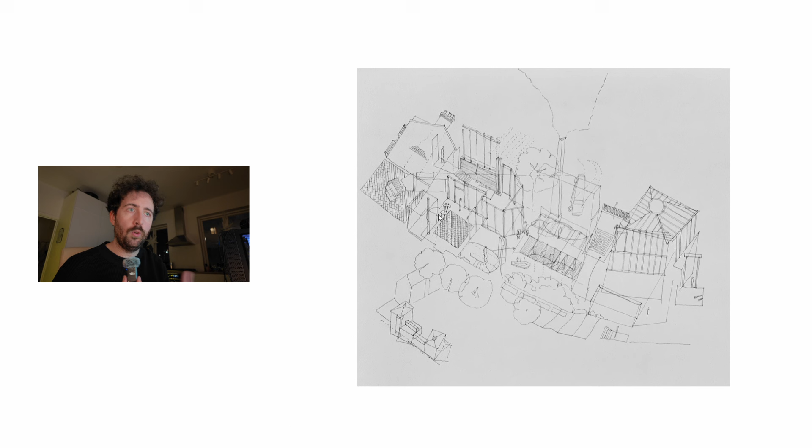This is how I work. It's how I worked when I was a student, but even today, professionally, I work with pen and paper and pencil and physical models whenever I can. It's just how I like to work. So your portfolio should reflect who you are as a designer, in my opinion. And it's okay to have messy, unfinished work. You just have to make sure you're telling the story the right way.

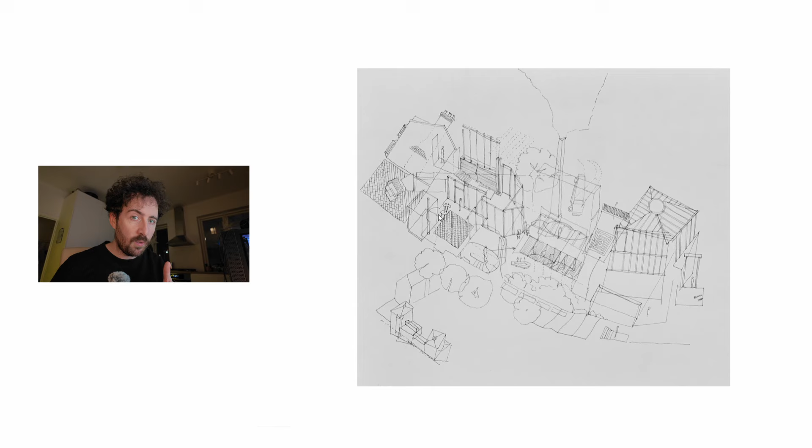So that's my advice to anybody watching this. As long as your portfolio is telling a good story, then I think you're going to be okay. And I hope this was useful.